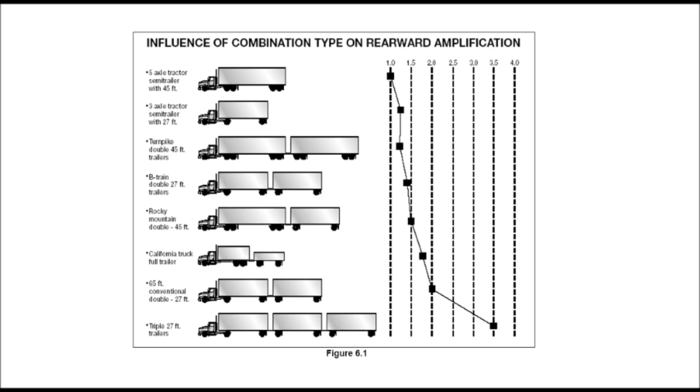65-foot conventional double, 27-foot, 2.0. Triple 27-foot trailers, 3.5. Footnote from R.D. Ervin, R.L. Nisonger, C.C. MacAdam, and P.S. Fancher, Influence of Size and Weight Variables on the Stability and Control Properties of Heavy Trucks, University of Michigan Transportation Research Institute, 1983.

6.1.5 Prevent trailer skids. When the wheels of a trailer lock up, the trailer will tend to swing around. This is more likely to happen when the trailer is empty or lightly loaded. This type of jackknife is often called a trailer jackknife. See Figure 6.2, page 6-2: Trailer jackknife, showing the line of travel and trailer wheels locked up and sliding.

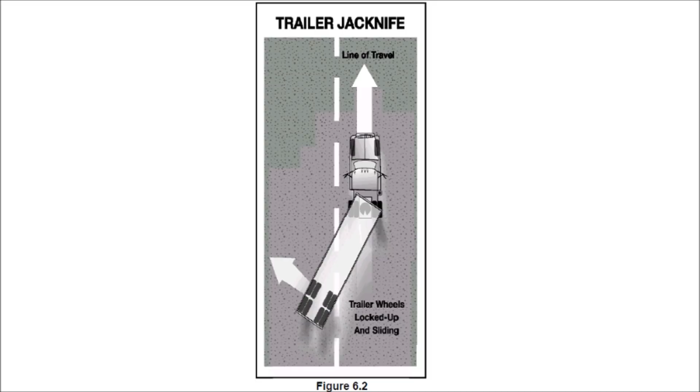The procedure for stopping a trailer skid is to recognize the skid. The earliest and best way to recognize that the trailer has started to skid is by seeing it in your mirrors. Anytime you apply the brakes hard, check the mirrors to make sure the trailer is staying where it should be. Once the trailer swings out of your lane, it's very difficult to prevent a jackknife.

Stop using the brakes. Release the brakes to get traction back. Do not use the trailer handbrake, if you have one, to straighten out the rig. This is the wrong thing to do since the brakes on the trailer wheels caused the skid in the first place. Once the trailer wheels grip the road again, the trailer will start to follow the tractor and straighten out.

6.1.6 Turn wide. When a vehicle goes around a corner, the rear wheels follow a different path than the front wheels. This is called off-tracking or cheating. Figure 6.3 shows how off-tracking causes the path followed by a tractor to be wider than the rig itself. Longer vehicles will off-track more.

The rear wheels of the powered unit, truck or tractor, will off-track some, and the rear wheels of the trailer will off-track even more. If there is more than one trailer, the rear wheels of the last trailer will off-track the most. Steer the front end wide enough around a corner so the rear end does not run over the curb, pedestrians, etc. However, keep the rear of your vehicle close to the curb.

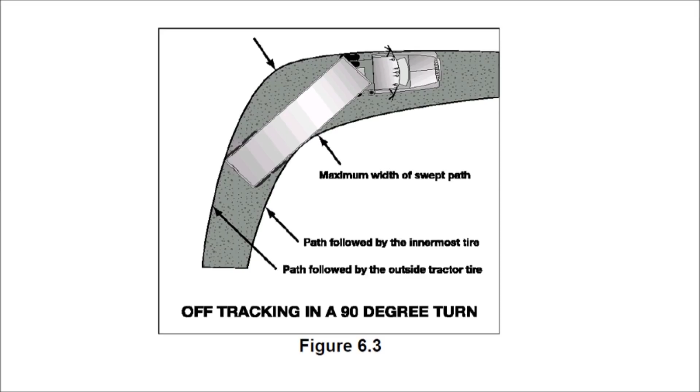6.1.7 Backing with a trailer. When backing a car, straight truck, or bus, you turn the top of the steering wheel in the direction you want to go. When backing a trailer, you turn the steering wheel in the opposite direction. Once the trailer starts to turn, you must turn the wheel the other way to follow the trailer.

Whenever you back up with a trailer, try to position your vehicle so you can back in a straight line. If you must back on a curved path, back to the driver's side so you can see. See Figure 6.5, page 6-3: Backing a trailer, showing how to turn the wheel one way to make the trailer go right, and the other way to make it go left.

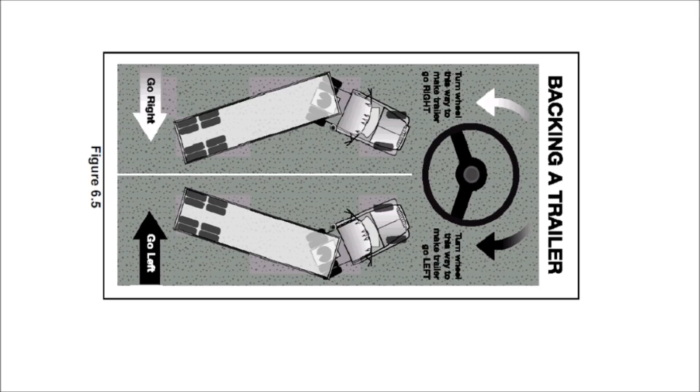Look at your path. Look at your line of travel before you begin. Get out and walk around the vehicle. Check your clearance to the sides and overhead, in and near the path of your vehicle.

Use mirrors on both sides. Check the outside mirrors on both sides frequently. Get out of the vehicle and re-inspect your path if you are unsure. Back slowly. This will let you make corrections before you get too far off course.

Correct drift immediately. As soon as you see the trailer getting off the proper path, correct it by turning the top of the steering wheel in the direction of the drift. Pull forward. When backing a trailer, make pull-ups to reposition your vehicle as needed.

Subsection 6.1, test your knowledge. 1. What two things are important to prevent rollover? 2. When you turn suddenly while pulling doubles, which trailer is most likely to turn over? 3. Why should you not use the trailer handbrake to straighten out a jackknifing trailer?

4. What is off-tracking? 5. When you back a trailer, you should position your vehicle so you can back in a curved path to the driver's side. True or false? 6. What type of trailers can get stuck on railroad highway crossings? These questions may be on your test. If you can't answer them all, reread subsection 6.1.

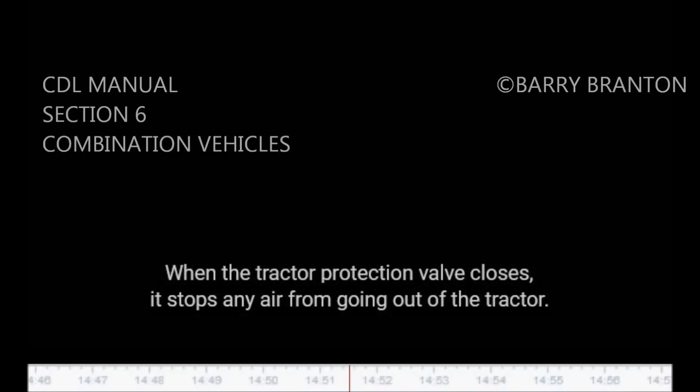6.2.2 Tractor protection valve. The tractor protection valve keeps air in the tractor or truck brake system should the trailer break away or develop a bad leak. The tractor protection valve is controlled by the trailer air supply control valve in the cab. The control valve allows you to open and shut the tractor protection valve. The tractor protection valve will close automatically if air pressure is low, in the range of 20 to 45 psi. When the tractor protection valve closes, it stops any air from going out of the tractor.

It also lets the air out of the trailer emergency line. This causes the trailer emergency brakes to come on, with possible loss of control. Emergency brakes are covered later.

6.2.3 Trailer air supply control. The trailer air supply control on newer vehicles is a red 8-sided knob which you use to control the tractor protection valve. You push it in to supply the trailer with air, and pull it out to shut the air off and put on the trailer emergency brakes.

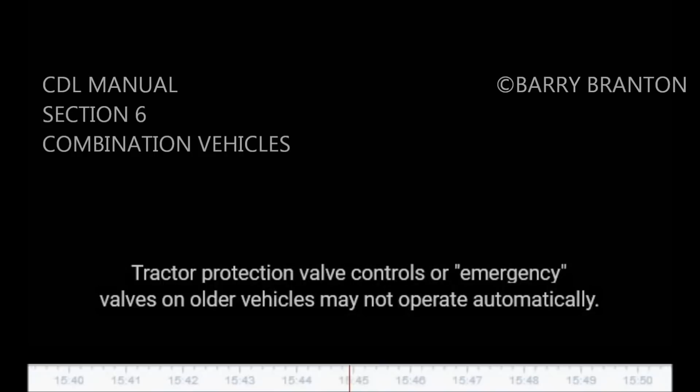The valve will pop out, thus closing the tractor protection valve, when the air pressure drops into the range of 20 to 45 psi. Tractor protection valve controls or emergency valves on older vehicles may not operate automatically. There may be a lever rather than a knob. The normal position is used for pulling a trailer. The emergency position is used to shut the air off and put on the trailer emergency brakes.

6.2.4 Trailer air lines. Every combination vehicle has two air lines, the service line and the emergency line. They run between each vehicle, tractor to trailer, trailer to dolly, dolly to second trailer, etc. Service air line. The service line, also called the control line or signal line, carries air, which is controlled by

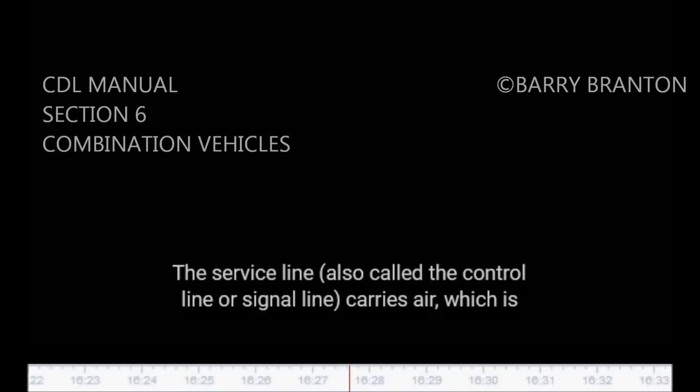the foot brake or the trailer hand brake. Depending on how hard you press the foot brake or hand valve, the pressure in the service line will similarly change. The service line is connected to relay valves. These valves allow the trailer brakes to be applied more quickly than would otherwise be possible.

Emergency air line. The emergency line, also called the supply line, has two purposes. First, it supplies air to the trailer air tanks. Second, the emergency line controls the emergency brakes on combination vehicles. Loss of air pressure in the emergency line causes the trailer emergency brakes to come on. The pressure loss could be caused by a trailer breaking loose, thus tearing apart the emergency air hose. Or it could be caused by a hose, metal tubing, or other part breaking, letting the air out.

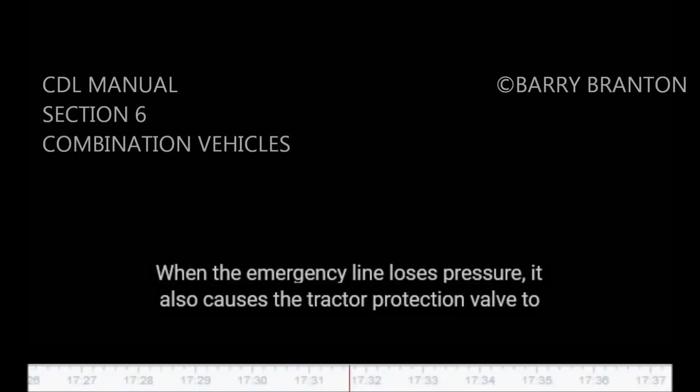When the emergency line loses pressure, it also causes the tractor protection valve to close. The air supply knob will pop out. Emergency lines are often coded with the color red hose, red couplers, or other parts, to keep from getting them mixed up with the blue service line.

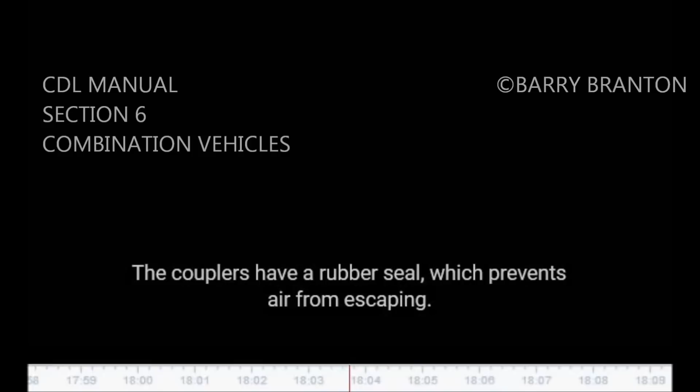6.2.5 Hose couplers, glad hands. Glad hands are coupling devices used to connect the service and emergency air lines from the truck or tractor to the trailer. The couplers have a rubber seal which prevents air from escaping. Clean the couplers and rubber seals before a connection is made.

When connecting the glad hands, press the two seals together with the couplers at a 90-degree angle to each other. A turn of the glad hand attached to the hose will join and lock the couplers. When coupling, make sure to couple the proper glad hands together.

To help avoid mistakes, colors are sometimes used. Blue is used for the service lines and red for the emergency, supply lines. Sometimes, metal tags are attached to the lines with the words service and emergency stamped on them. See Figure 6.6 on page 6-5. Emergency line, red, check for cracks. Truck line, trailer line, service line, blue.

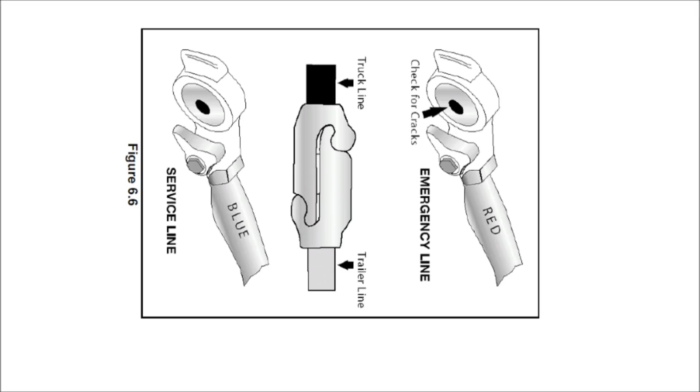Continuing with the text: if you do cross the air lines, supply air will be sent to the service line instead of going to charge the trailer air tanks.

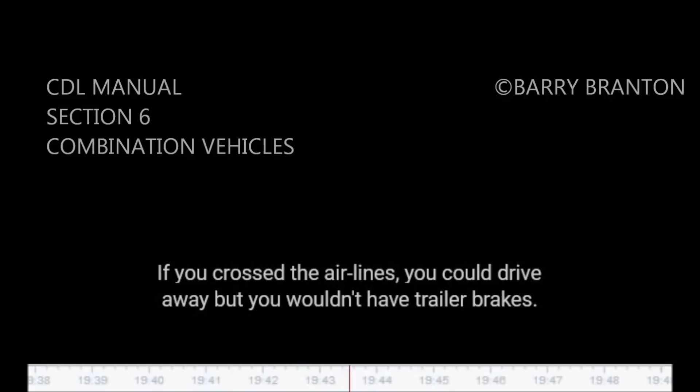Air will not be available to release the trailer spring brakes, parking brakes. If the spring brakes don't release when you push the trailer air supply control, check the airline connections. Older trailers do not have spring brakes. If the air supply in the trailer air tank has leaked away, there will be no emergency brakes, and the trailer wheels will turn freely. If you crossed the air lines, you could drive away, but you wouldn't have trailer brakes. This would be very dangerous.

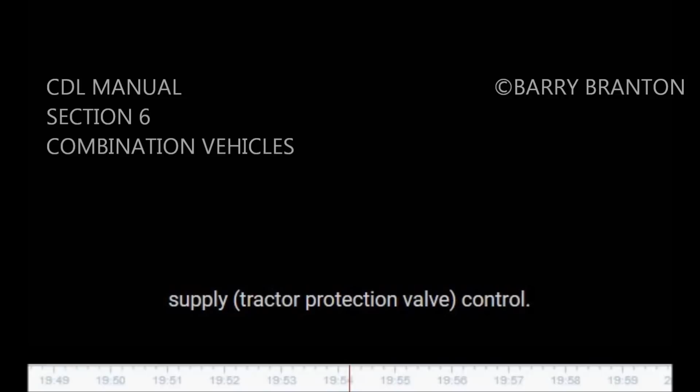Always test the trailer brakes before driving with the hand valve or by pulling the trailer air supply, tractor protection valve, control. Pull gently against them in a low gear to make sure the brakes work.

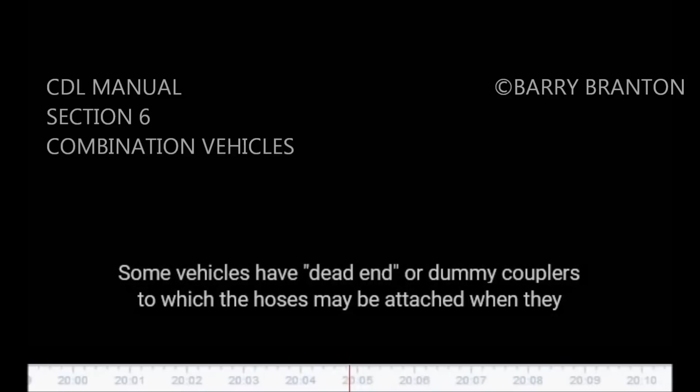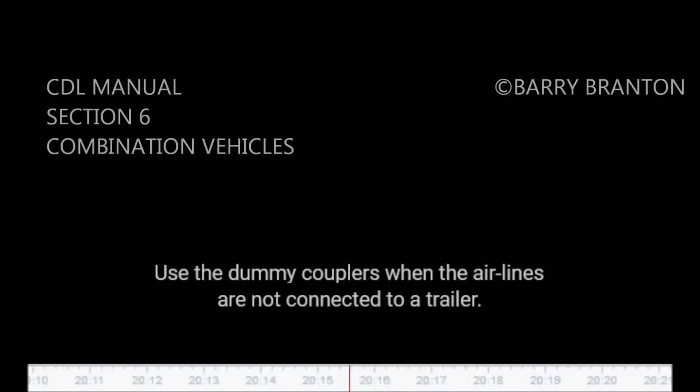Some vehicles have dead-end or dummy couplers, to which the hoses may be attached when they are not in use. This will prevent water and dirt from getting into the coupler and the air lines. Use the dummy couplers when the air lines are not connected to a trailer. If there are no dummy couplers, the glad hands can sometimes be locked together, depending on the couplings. It is very important to keep the air supply clean.

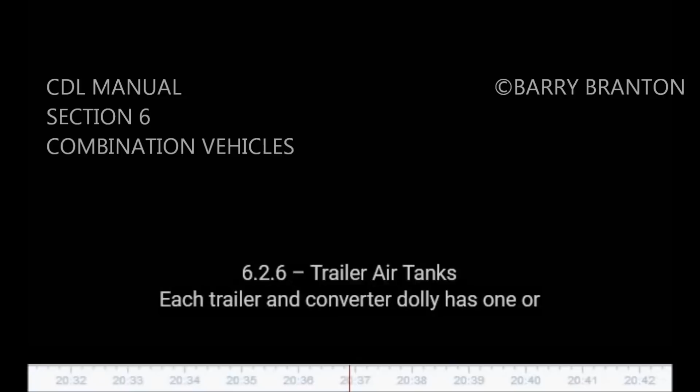6.2.6 Trailer Air Tanks. Each trailer and converter dolly has one or more air tanks. They are filled by the emergency supply line from the tractor. They provide the air pressure used to operate trailer brakes. Air pressure is sent from the air tanks to the brakes by relay valves. The pressure in the service line tells how much pressure the relay valves should send to the trailer brakes. The pressure in the service line is controlled by the brake pedal and the trailer handbrake.

It is important that you don't let water and oil build up in the air tanks. If you do, the brakes may not work correctly. Each tank has a drain valve on it, and you should drain each tank every day. If your tanks have automatic drains, they will keep most moisture out, but you should still open the drains to make sure.

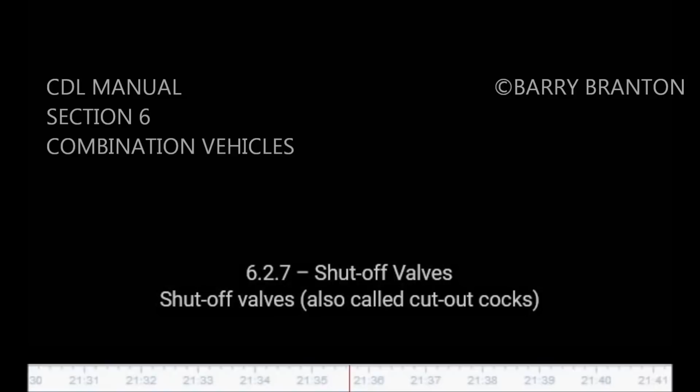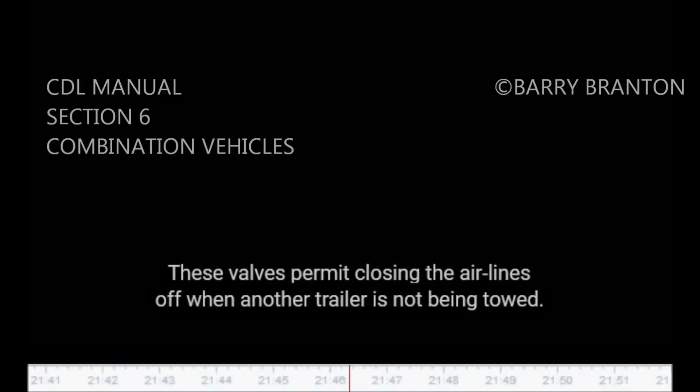6.2.7 Shutoff Valves. Shutoff valves, also called cutout cocks, are used in the service and supply air lines at the back of trailers used to tow other trailers. These valves permit closing the air lines off when another trailer is not being towed. You must check that all shutoff valves are in the open position, except the ones at the back of the last trailer, which must be closed.

6.2.8 Trailer Service, Parking, and Emergency Brakes. Newer trailers have spring brakes just like trucks and truck tractors. However, converter dollies and trailers built before 1975 are not required to have spring brakes. Those that do not have spring brakes have emergency brakes, which work from the air stored in the trailer air tank. The emergency brakes come on whenever air pressure in the emergency line is lost. These trailers have no parking brake. The emergency brakes come on whenever the air supply knob is pulled out or the trailer is disconnected.

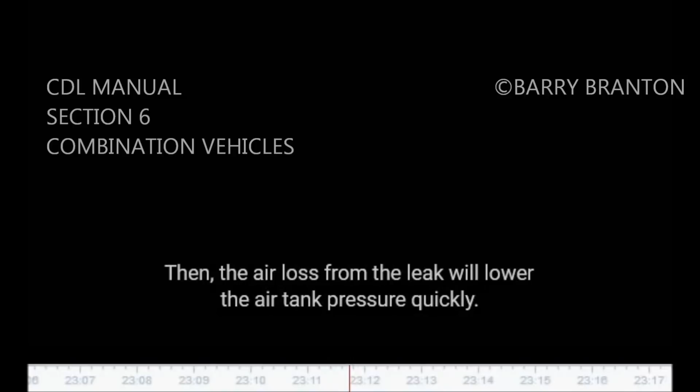A major leak in the emergency line will cause the tractor protection valve to close and the trailer emergency brakes to come on. But the brakes will hold only as long as there is air pressure in the trailer air tank. Eventually, the air will leak away and then there will be no brakes. Therefore, it is very important for safety that you use wheel chocks when you park trailers without spring brakes. You may not notice a major leak in the service line until you try to put the brakes on. Then, the air loss from the leak will lower the air tank pressure quickly. If it goes low enough, the trailer emergency brakes will come on.

Subsection 6.2 Test your knowledge. 1. Why should you not use the trailer hand valve while driving? 2. Describe what the trailer air supply control does. 3. Describe what the service line is for. 4. What is the emergency air line for? 5. Why should you use chocks when parking a trailer without spring brakes? 6. Where are shutoff valves? These questions may be on your test. If you can't answer them all, reread subsection 6.2.

6.3 Antilock Brake Systems. 6.3.1 Trailers required to have ABS. All trailers and converter dollies built after March 1, 1998 are required to have ABS. However, many trailers and converter dollies built before this date have been voluntarily equipped with ABS. Trailers will have yellow ABS malfunction lamps on the left side, either on the front or rear corner. See Figure 6.7. Dollies manufactured on or after March 1, 1998 are required to have a lamp on the left side. Picture on page 6-6, Figure 6.7, Testing ABS Systems.

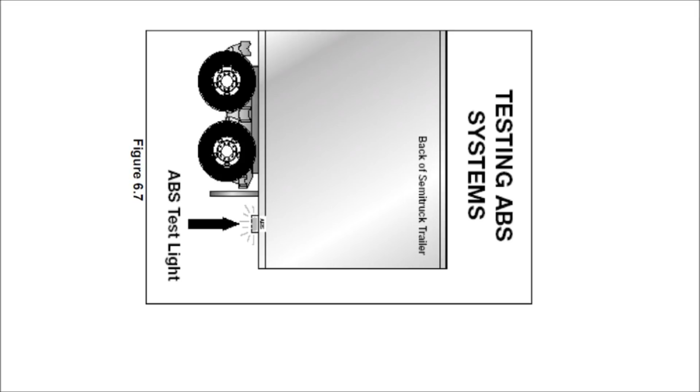Back of semi-truck trailer. ABS test light. Continuing with the text. In the case of vehicles manufactured before the required date, it may be difficult to tell if the unit is equipped with ABS. Look under the vehicle for the ECU and wheel speed sensor wires coming from the back of the brakes.

6.3.2 Braking with ABS. ABS is an addition to your normal brakes. It does not decrease or increase your normal braking capability. ABS only activates when wheels are about to lock up.

ABS does not necessarily shorten your stopping distance, but it does help you keep the vehicle under control during hard braking. ABS helps you avoid wheel lockup. The computer senses impending lockup, reduces the braking pressure to a safe level, and you maintain control.

Having ABS on only the trailer, or even on only one axle, still gives you more control over the vehicle during braking. When only the trailer has ABS, the trailer is less likely to swing out, but if you lose steering control or start a tractor jackknife, let up on the brakes, if you can safely do so, until you gain control.

When you drive a tractor-trailer combination with ABS, you should brake as you always have. In other words, use only the braking force necessary to stop safely and stay in control. Brake the same way, regardless of whether you have ABS on the tractor, the trailer, or both.

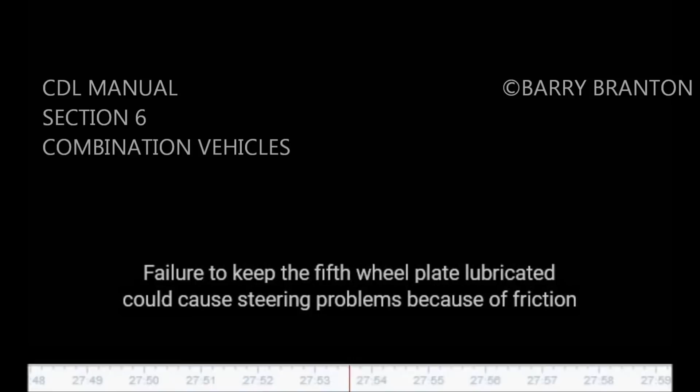Check if fifth wheel is in proper position for coupling. Wheel tilted down toward rear of tractor. Jaws open. Safety unlocking handle in the automatic lock position. If you have a sliding fifth wheel, make sure it is locked. Make sure the trailer kingpin is not bent or broken.

Step 2. Inspect area and chock wheels. Make sure area around the vehicle is clear. Be sure trailer wheels are chocked or spring brakes are on. Check that cargo, if any, is secured against movement due to tractor being coupled to the trailer.

Step 3. Position tractor. Put the tractor directly in front of the trailer. Never back under the trailer at an angle because you might push the trailer sideways and break the landing gear. Check position using outside mirrors by looking down both sides of the trailer.

Step 4. Back slowly. Back until fifth wheel just touches the trailer. Don't hit the trailer. Step 5. Secure tractor. Put on the parking brake. Put transmission in neutral.

Step 6. Check trailer height. The trailer should be low enough that it is raised slightly by the tractor when the tractor is backed under it. Raise or lower the trailer as needed. If the trailer is too low, the tractor may strike and damage the trailer nose. If the trailer is too high, it may not couple correctly. Check that the kingpin and fifth wheel are aligned.

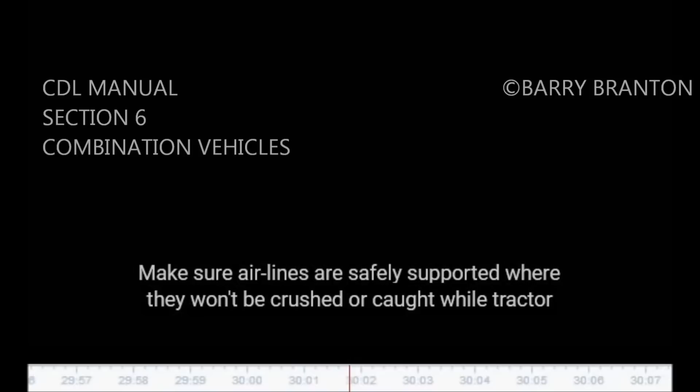Step 8. Supply air to trailer. From cab, push in air supply knob or move tractor protection valve control from the emergency to the normal position to supply air to the trailer brake system. Wait until the air pressure is normal. Check brake system for crossed air lines.

Shut engine off so you can hear the brakes. Apply and release trailer brakes and listen for sound of trailer brakes being applied and released. You should hear the brakes move when applied and air escape when the brakes are released. Check air brake system pressure gauge for signs of major air loss.

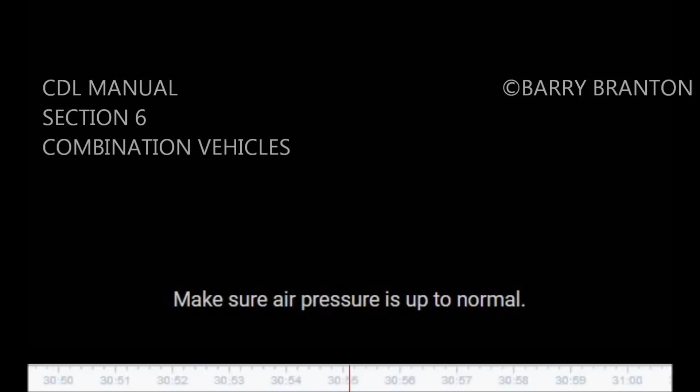When you are sure trailer brakes are working, start engine. Make sure air pressure is up to normal. Step 9. Lock trailer brakes. Pull out the air supply knob or move the tractor protection valve control from normal to emergency.

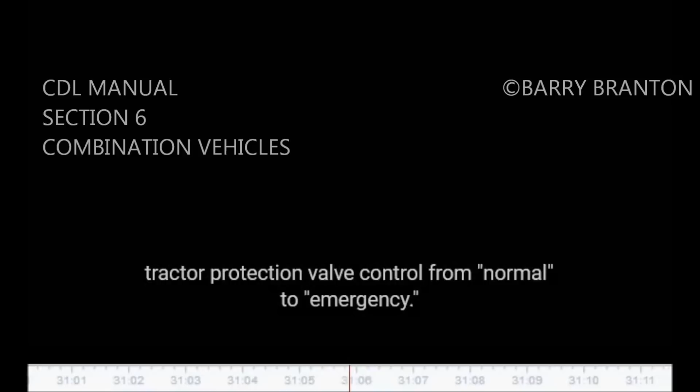Step 10. Back under trailer. Use lowest reverse gear. Back tractor slowly under trailer to avoid hitting the kingpin too hard. Stop when the kingpin is locked into the fifth wheel. Step 11. Check connection for security. Raise trailer landing gear slightly off ground.

Pull tractor gently forward while the trailer brakes are still locked to check that the trailer is locked onto the tractor. Step 12, secure vehicle: put transmission in neutral, put parking brakes on.

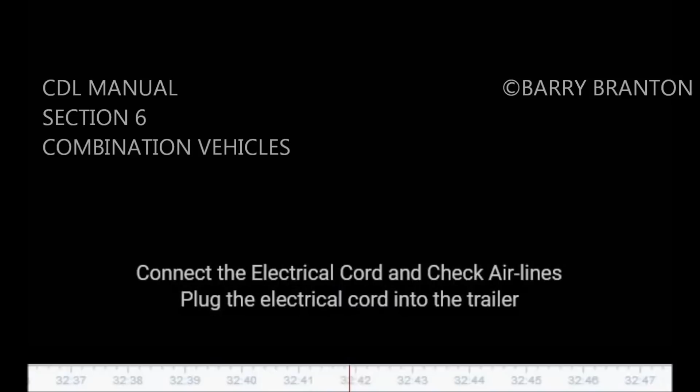Step 14, connect the electrical cord and check air lines. Plug the electrical cord into the trailer and fasten the safety catch. Check both air lines and the electrical line for signs of damage. Make sure air and electrical lines will not hit any moving parts of the vehicle.

Step 15, raise front trailer supports, the landing gear. Use low gear range, if so equipped, to begin raising the landing gear. Once free of weight, switch to the high gear range. Raise the landing gear all the way up.

Never drive with the landing gear only part way up, as it may catch on railroad tracks or other things. After raising the landing gear, secure the crank handle safely.

When full weight of the trailer is resting on the tractor, check for enough clearance between the rear of the tractor frame and the landing gear. When the tractor turns sharply, it must not hit the landing gear. Check that there is enough clearance between the top of the tractor tires and the nose of the trailer.

Step 16, remove trailer wheel chocks. Remove and store wheel chocks in a safe place.

6.4.2, uncoupling tractor semi-trailers. The following steps will help you to uncouple safely.

Step 1, position rig. Make sure the surface of the parking area can support the weight of the trailer. Have the tractor lined up with the trailer. Pulling out at an angle can damage the landing gear.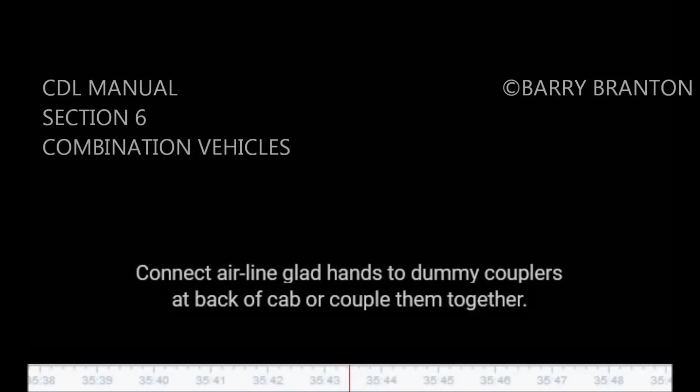Hang the electrical cable with plug down to prevent moisture from entering it. Make sure lines are supported so they won't be damaged while driving the tractor.

Step 6, unlock fifth wheel. Raise the release handle lock. Pull the release handle to open position. Keep legs and feet clear of the rear tractor wheels to avoid serious injury in case the vehicle moves.

Step 7, pull tractor partially clear of trailer. Pull the tractor forward until the fifth wheel comes out from under the trailer. Stop with the tractor frame under the trailer. This prevents the trailer from falling to the ground if the landing gear should collapse or sink.

Step 8, secure tractor. Apply parking brake, place transmission in neutral. Step 9, inspect trailer supports.

Make sure the ground is supporting the trailer. Make sure the landing gear is not damaged.

Step 10, pull tractor clear of trailer. Release parking brakes. Check the area and drive the tractor forward until it clears.

Subsections 6.3 and 6.4. Test your knowledge.

1. What might happen if the trailer is too high when you try to couple? 2. After coupling, how much space should be between the upper and lower fifth wheel? 3. You should look into the back of the fifth wheel to see if it is locked onto the kingpin, true or false?

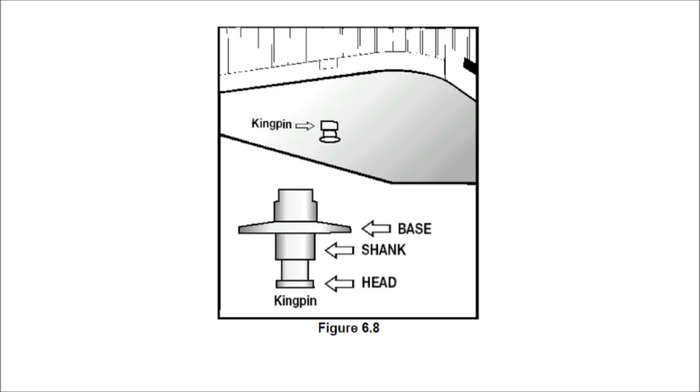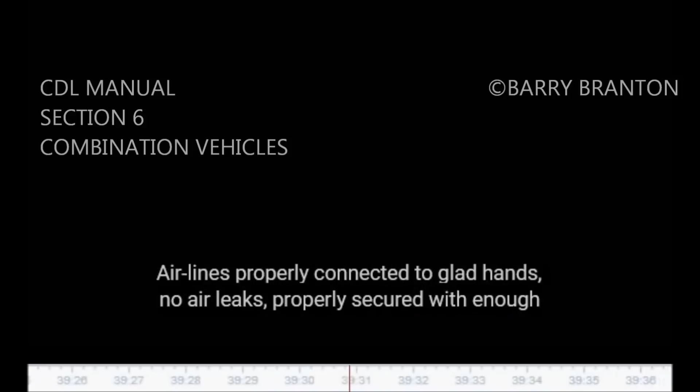Air and electric lines to trailer. Electrical cord firmly plugged in and secured. Air lines properly connected to glad hands, no air leaks, properly secured with enough slack for turns. All lines free from damage.

Sliding fifth wheel: slide not damaged or parts missing, properly greased, all locking pins present and locked in place, no air leaks if air-powered. Check that fifth wheel is not so far forward that tractor frame will hit landing gear or the cab hit the trailer during turns. Landing gear: fully raised, no missing parts, not bent or otherwise damaged, crank handle in place and secured, no air or hydraulic leaks if power operated.

Combination Vehicle Brake Check. Do these checks in addition to Section 5.3, Inspecting Air Brake Systems. The following section explains how to check air brakes on combination vehicles.

Check the brakes on a double or triple trailer as you would any combination vehicle. Check that air flows to all trailers. Use the tractor parking brake and/or chock the wheels to hold the vehicle. Wait for air pressure to reach normal, then push in the red trailer air supply knob. This will supply air to the emergency supply lines.

Use the trailer handbrake to provide air to the service line. Go to the rear of the rig. Open the emergency line shutoff valve at the rear of the last trailer. You should hear air escaping, showing the entire system is charged. Close the emergency line valve.

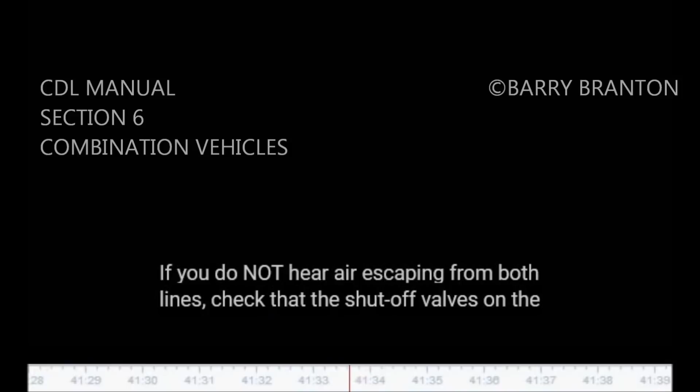Open the service line valve to check that service pressure goes through all the trailers. This test assumes that the trailer handbrake or the service brake pedal is on, and then close the valve. If you do not hear air escaping from both lines, check that the shutoff valve on the trailer or trailers and dolly or dollies are in the open position. You must have air all the way to the back for all the brakes to work.

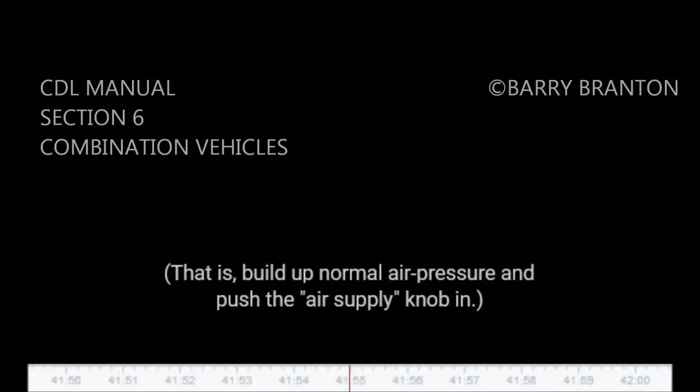Test tractor protection valve: charge the trailer air brake system, that is, build up normal air pressure and push the air supply knob in. Shut the engine off. Step on and off the brake pedal several times to reduce the air pressure in the tanks. The trailer air supply control, also called the tractor protection valve control, should pop out, or go from normal to emergency position, when the air pressure falls into the pressure range specified by the manufacturer, usually within the range of 20 to 45 psi.

If the tractor protection valve doesn't work right, an air hose or trailer brake leak could drain all the air from the tractor. This would cause the emergency brakes to come on, with possible loss of control.

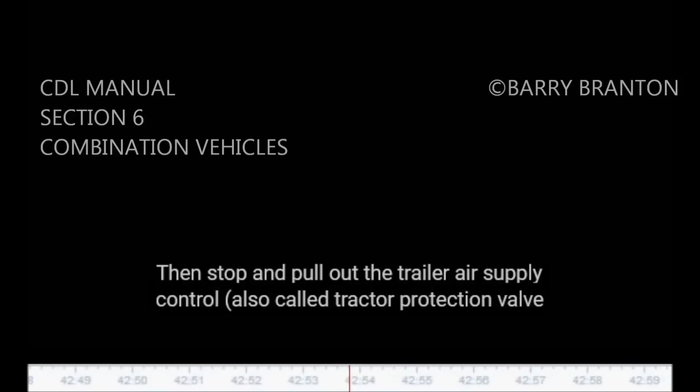Test trailer emergency brakes: charge the trailer air brake system and check that the trailer rolls freely. Then stop and pull out the trailer air supply control, also called tractor protection valve control or trailer emergency valve, or place it in the emergency position. Pull gently on the trailer with the tractor to check that the trailer emergency brakes are on.

Test trailer service brakes: check for normal air pressure, release the parking brakes, move the vehicle forward slowly, and apply trailer brakes with the hand control, trolley valve, if so equipped. You should feel the brakes come on. This tells you the trailer brakes are connected and working. The trailer brakes should be tested with the hand valve, but controlled in normal operation with the foot pedal, which applies air to the service brakes at all wheels.

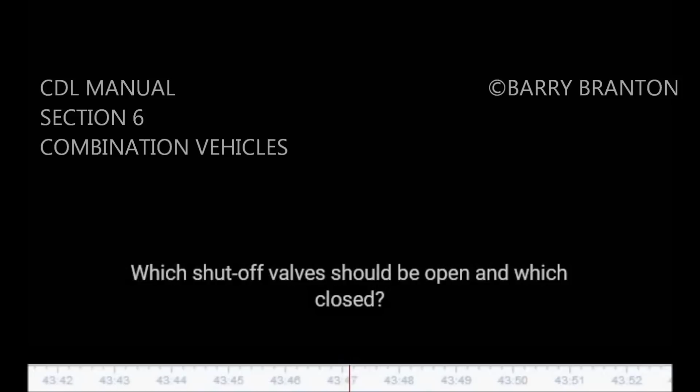Subsection 6.5, test your knowledge: 1. Which shutoff valves should be open and which closed? 2. How can you test that air flows to all trailers? 3. How can you test the tractor protection valve? 4. How can you test the trailer emergency brakes? 5. How can you test the trailer service brakes? These questions may be on your test. If you can't answer all of them, reread subsection 6.5.